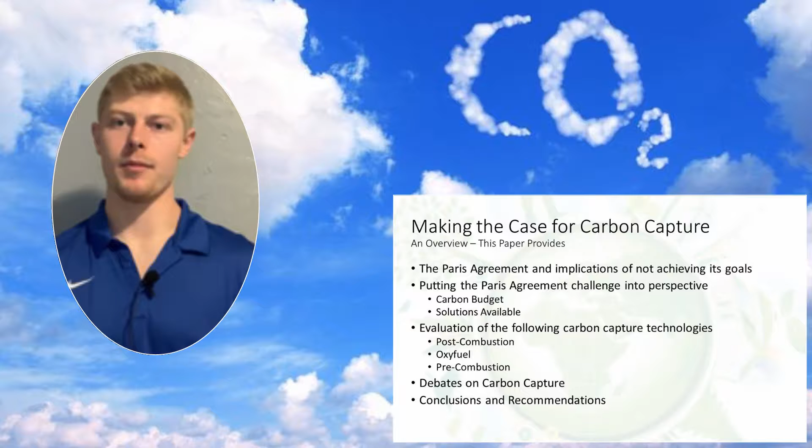An overview of this presentation: first we'll be going over the Paris Agreement and implications of not achieving the goals set there. I'll put the agreement into perspective and discuss the carbon budget and what remains of it, and the solutions available. I'll be evaluating the following carbon capture technologies, which entail post-combustion, oxy-fuel, and pre-combustion. I'll also be discussing the debates on carbon capture and some current obstacles facing it, and then I'll sum it all up at the end.

The Paris Agreement was basically a commitment to limit post-industrialization global temperature to no more than 2 degrees Celsius. In December of 2015, nearly 200 countries signed this legally binding agreement.

How did we come to this 2 degrees Celsius benchmark? Well, a Yale economist known as William Nordhaus—interestingly enough, he's an economist, not a scientist—decided science alone can't dictate this benchmark, but it also depends on society's values and current technology. In conclusion, he decided a reasonable benchmark would be a temperature increase that one would observe from the doubling of CO2 levels from the pre-industrial era, which equates to about a 2 degrees Celsius increase.

Now, the implications of not reducing our emissions in time and witnessing a 2 degrees Celsius increase would be a much warmer world, increased ocean levels, and agriculture, infrastructure, weather patterns, as well as the world economy would be dramatically affected.

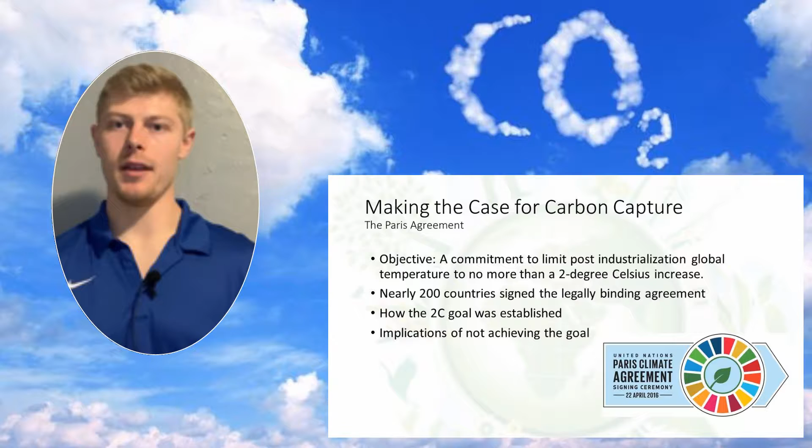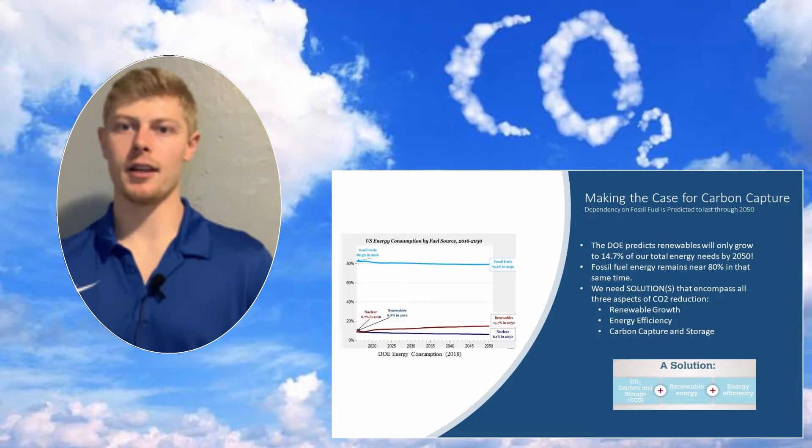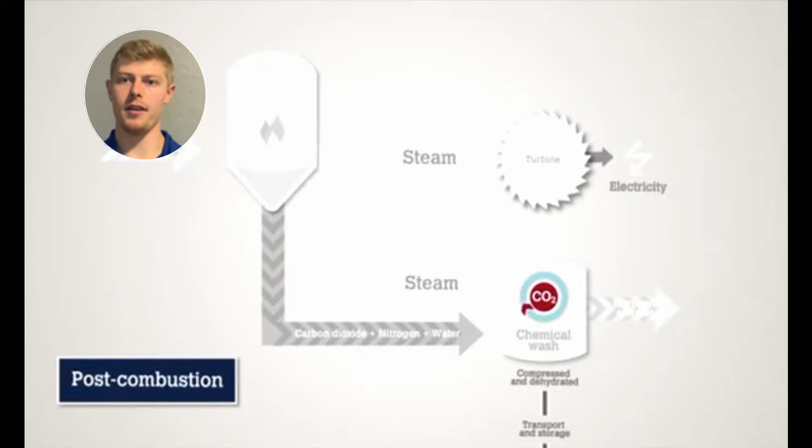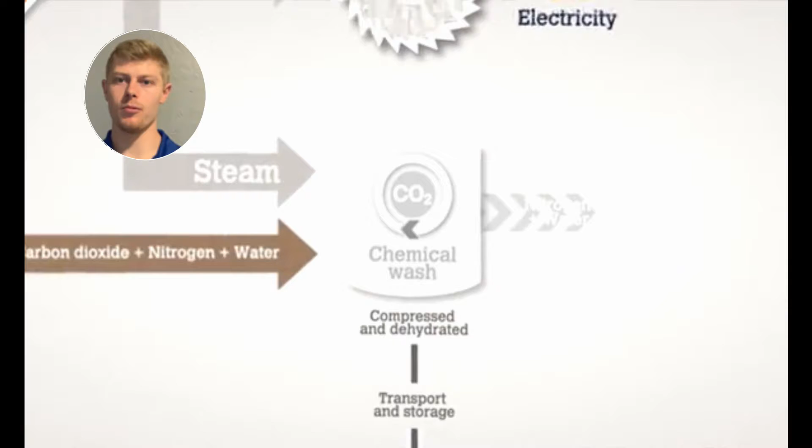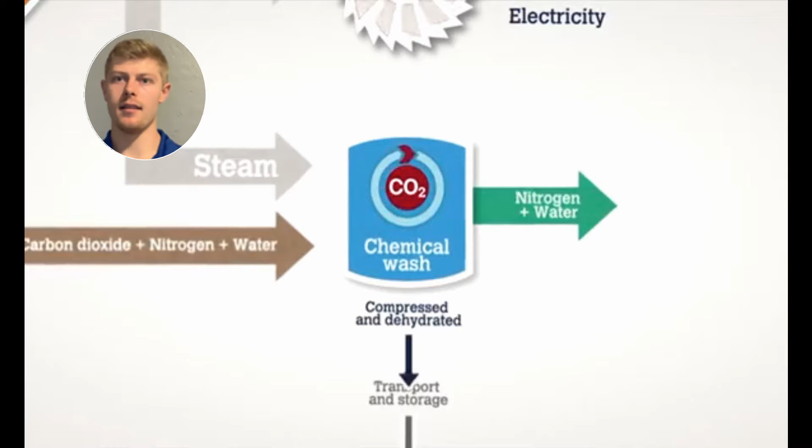The first method is post-combustion, and its largest benefit is the ability to retrofit this process to any pre-existing power plant. It's basically taking the air, and fuel is then combusted into a boiler. Steam is a byproduct, which is used to power turbines or other electricity. The remainder flue gas is run through a chemical wash, basically a packed column with the solvent monoethanolamine, which will strip the CO2 from the gas, and through compression and dehydration, the CO2 is ready to then be transported and stored.

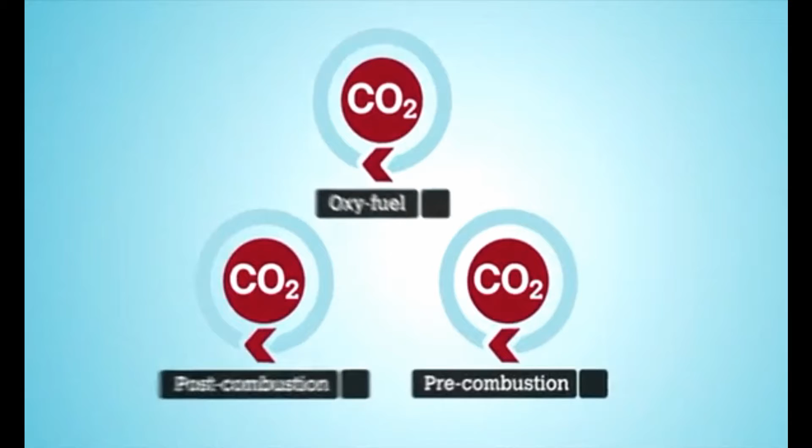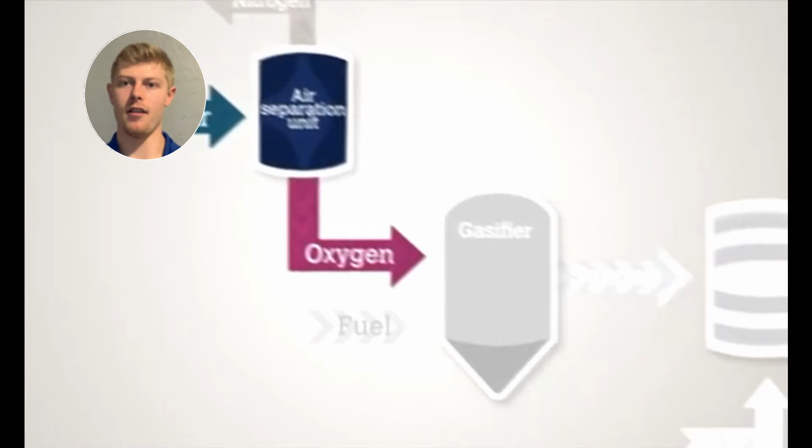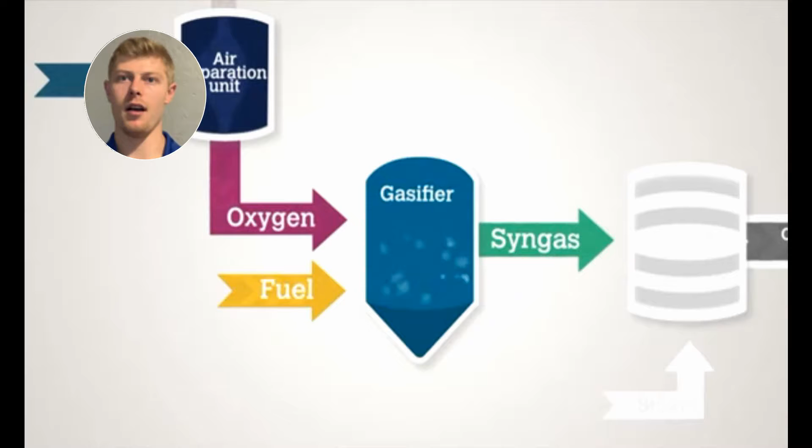When talking about pre-combustion, this method has its benefits as the carbon dioxide is captured before it is combusted. First, the air is denitrified through an air separation unit, and using pure oxygen, you add the fossil fuel into a gasifier, which creates a syngas mostly consisting of carbon monoxide and hydrogen. Through a gas shift reaction, CO2 and hydrogen are created, and from there the CO2 is ready to be compressed and dehydrated and ready for transport and storage.

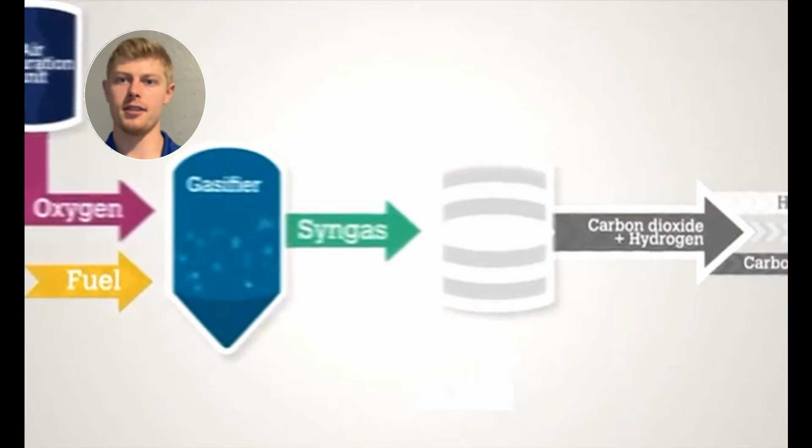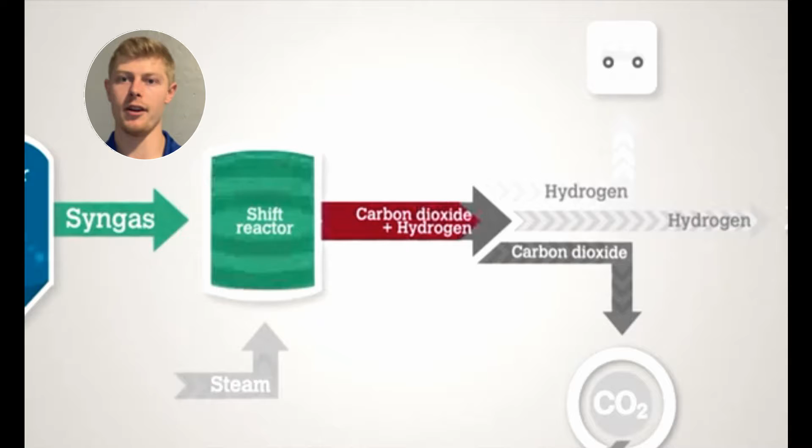The hydrogen, like other processes, can then be used to power gas turbines and other electricity. The main importance is that once the flue gas is emitted into the atmosphere, it contains no harmful global warming gas.

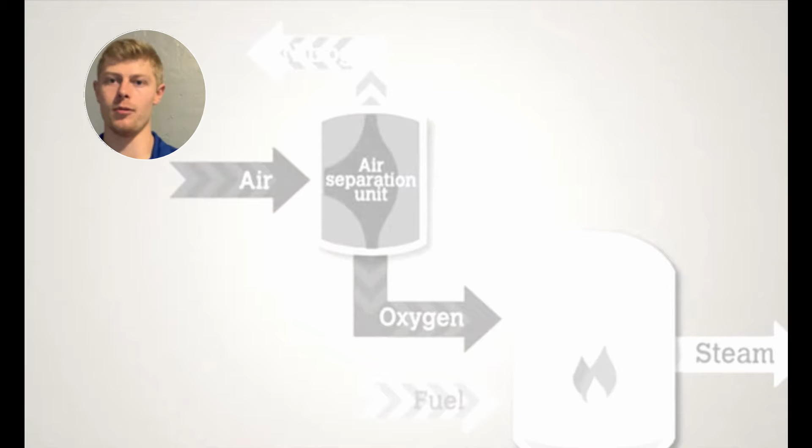The last method is oxy-fuel combustion, and this method might be the most efficient as it captures the highest concentration of CO2, between 80 and 98%. First, the air is run through an air separation unit again, where it is denitrified. The fossil fuel is added into a boiler where it is combusted in pure oxygen.

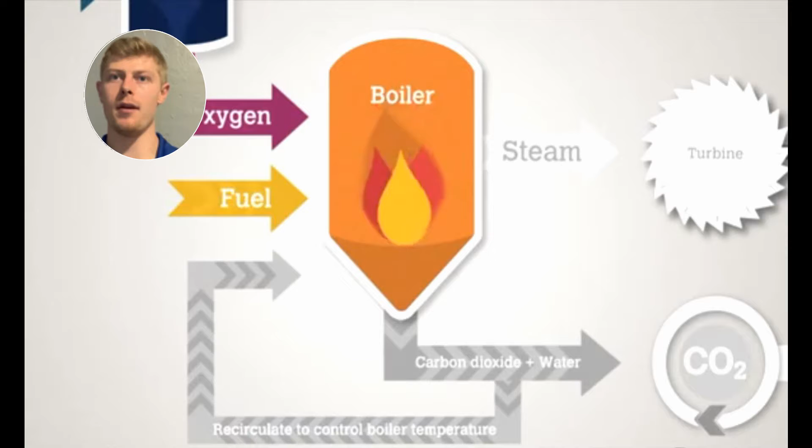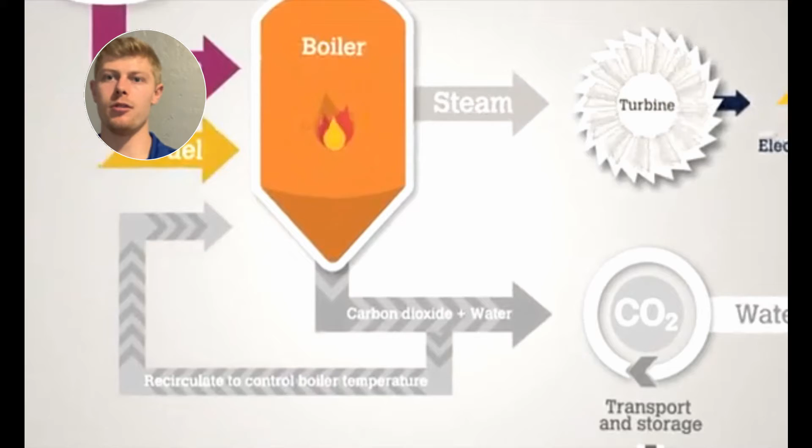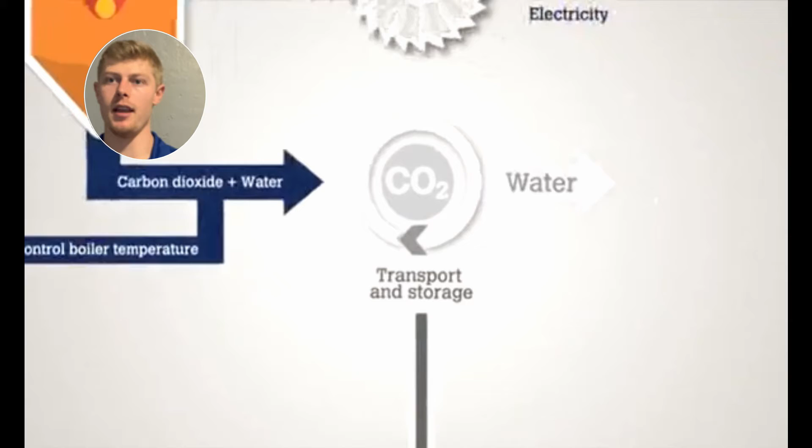In turn, steam is produced, which is used to power turbines and other fuel sources. CO2 and water are produced, which is also recirculated through the boiler to control its temperature. But after that, the CO2 is captured, compressed, and ready to be transported and stored.

So while I was talking through the steps of each process and how it exactly happens, I was kind of talking about the advantages of each one, but now I'll go into a more black and white explanation of each one and the impacts of them.

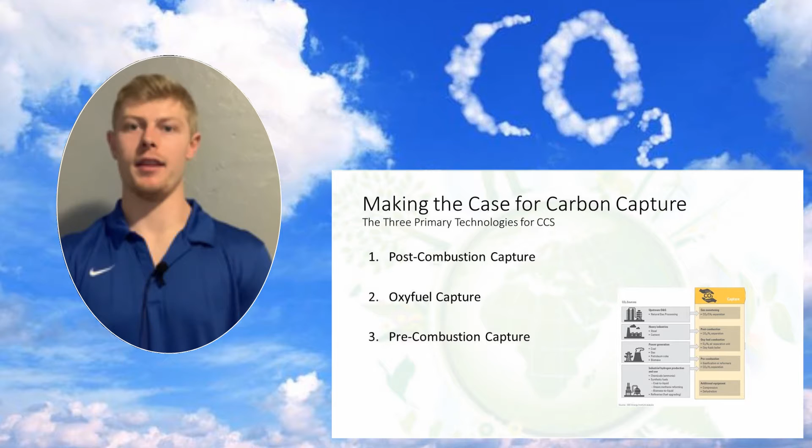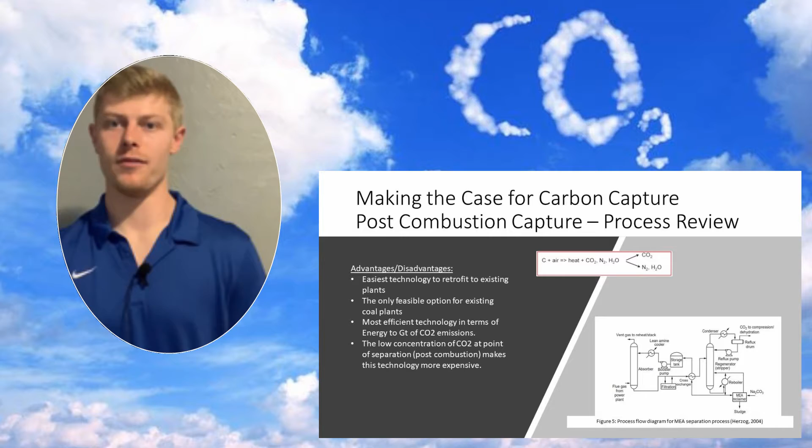With post-combustion, it's the easiest technology to retrofit to existing plants, and it is the only feasible option for existing coal plants. It's the most efficient technology in terms of energy to gigatons of CO2 emissions, and the low concentration of CO2 at the point of separation, after it's combusted, makes this technology more expensive.

With oxy-fuel combustion, it has the highest concentration of CO2 at any point of separation, which is 80 to 98% of CO2. The remaining particles can be removed through electrostatic methods. Oxy-fuel combustion also consumes large amounts of oxygen, and the air separation unit is very costly.

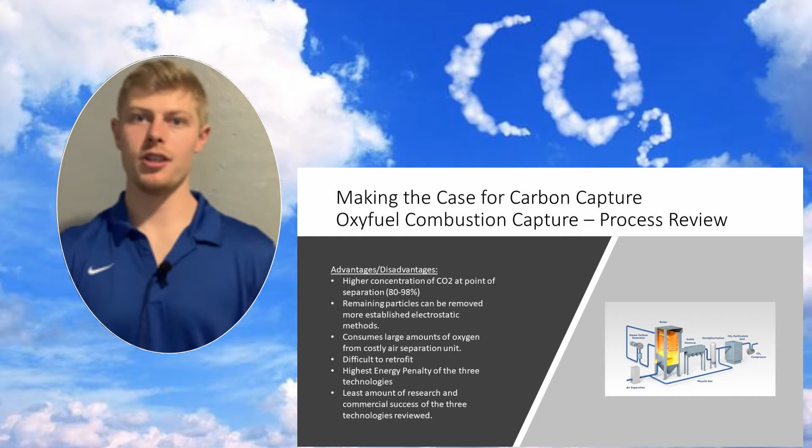It's difficult to retrofit to existing plants. It has the highest energy penalty of the three technologies, and this one also has the least amount of research and commercial success of the three technologies.

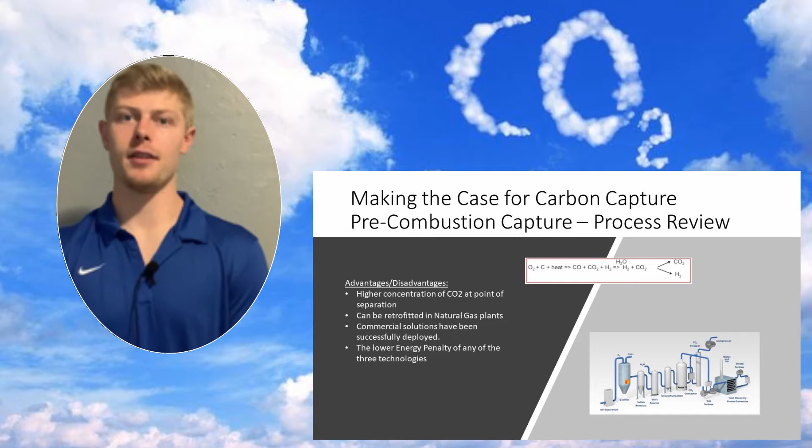Pre-combustion has a higher concentration, like oxy-fuel, of CO2 at point of separation. This technology can actually be retrofitted to natural gas plants very easily, and commercial solutions have been successfully deployed, and it has the lowest energy penalty of the three technologies.

Right now, there are about 22 operational carbon capture and storage facilities around the world, most of them being pilot projects. There just hasn't been too much utilization of carbon capture due to lack of funding and investment.

Here's what some of the criticism is saying. People are worried it'll just expand our oil production, provide a lifeline to a declining coal industry, and ultimately just further enable our reliance on the fossil fuel economy.

Also, storage is difficult, if not impossible, to monitor. Once the CO2 is injected deep underground, it has the potential to leak out back into the atmosphere. So we have to figure out a system to be able to track and monitor that.

Carbon capture also just requires more energy for the separation process, so we need to burn more fossil fuels to be able to capture it. Right now in the US, there's about 4,000 kilometers of CO2 pipeline. We would need to increase that number dramatically to make CO2 capture accessible to all power plants.

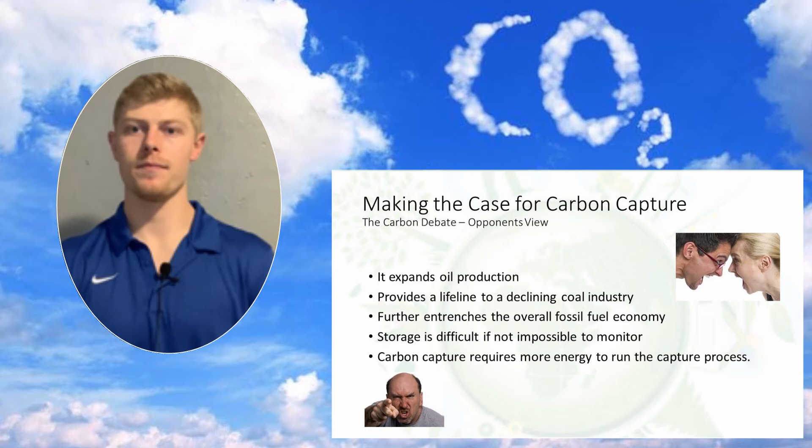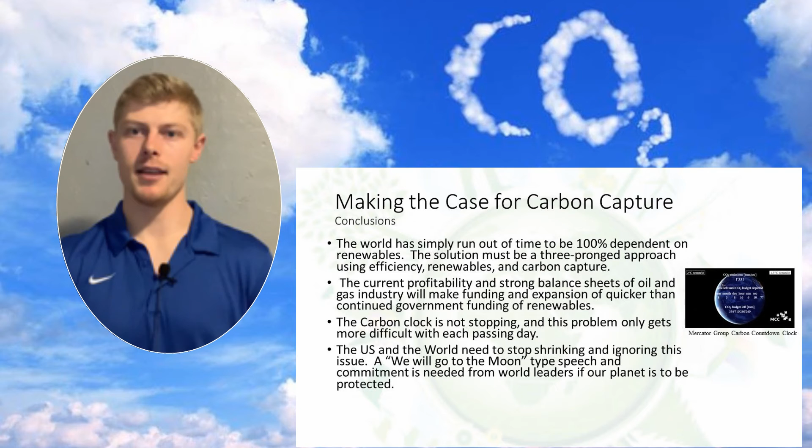So overall, we have the technology for carbon capture. We have ways to implement this process to existing plants and new plants. It's a matter of will at this point. Now there's no single solution to completely reducing our CO2 emissions. However, carbon capture and storage is the largest of many solutions.